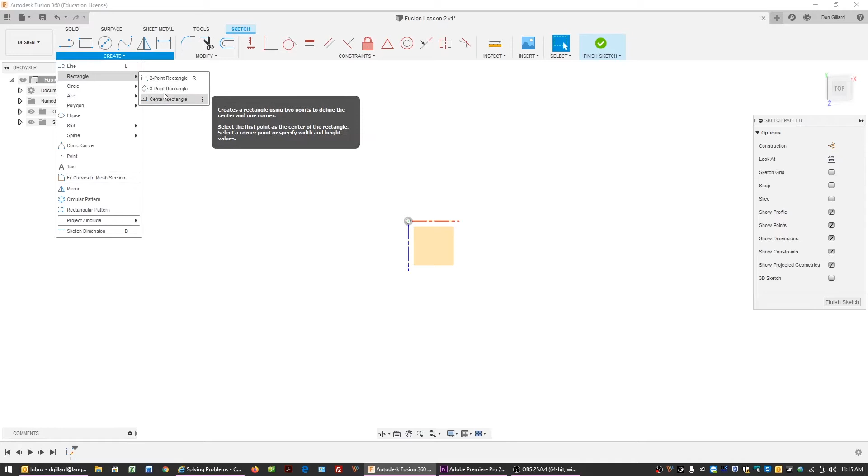Let's go to Create, and the second item down is Create Sketch. We'll click on the plan view, or top view plane. Now let's go up to Rectangle — as with most items, there are variables for how you create them, so let's use Center Rectangle. We'll click on the 0,0 origin point, and pull this out to about there.

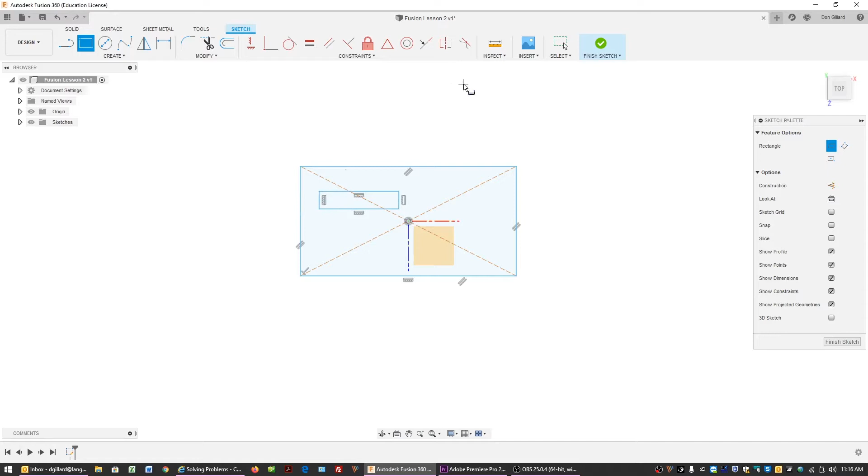Now, let's say I'm making a USB holder. I want another rectangle, but this isn't going where I want it, so let's use Create Rectangle 2 Point instead, so I don't have to start in the middle. That's great — I think I want to zoom in for this, and I'm going to create the inside of the holder.

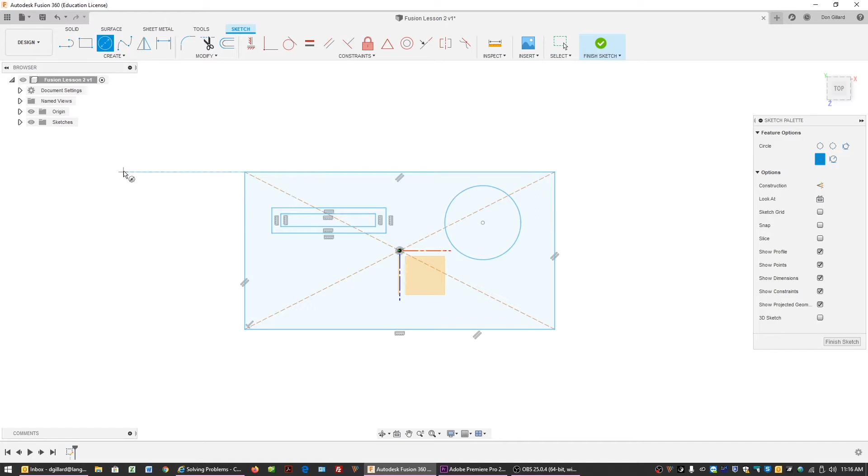Let's just create a circle over here for fun. Because I'm just trying to show you this, I'm going to do it fairly quickly — it won't be accurate or the right dimensions, but we'll go over how to do everything properly. Let's turn the origin off since we don't really need that right now.

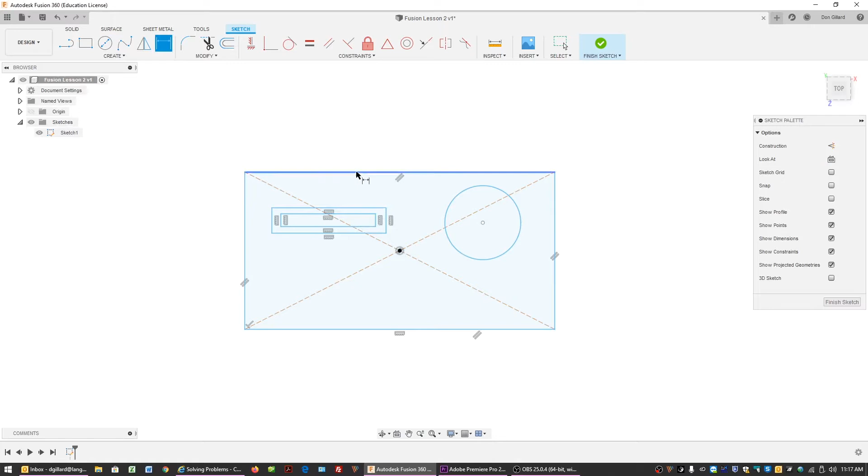Let's go to Create — the very bottom item is Sketch Dimension, shown with the letter D. You can also just hit D on your keyboard. When I click on a line, it lets me define that dimension. So I can say this should be 4 inches, and this one is 2.08 — let's just make that 2 inches. You can see how you can do all these objects with accurate dimensions.

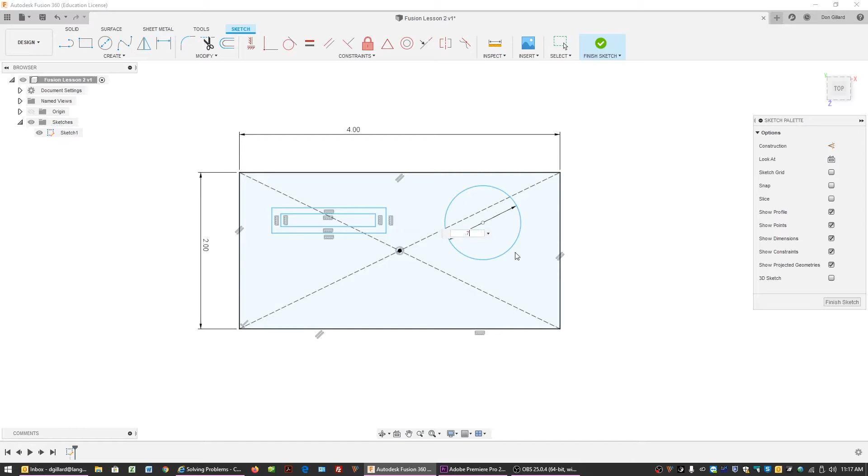So we could do accurate dimensions — I don't actually have a USB in front of me, so I'm just going to guess: let's say 1.5. Let's say that's 0.4, and again you can do it with this tool too — 1.2. I'm happy with that.

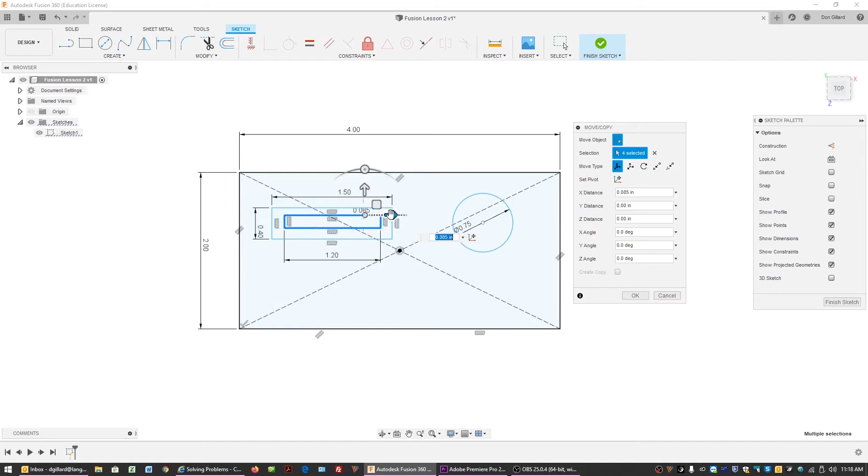Now let's go over to Modify, Move Copy. This isn't quite in the center — I'll show you a better way to do this in a bit, but we can move it now. You see these things up here, this is for rotating, so I can grab that and rotate an object too. I'll hit Control Z to undo that, and just move the arrows around until I'm happy with this, then go over here and hit OK. I'm happy with that.

Now I'll show you a better way to do that inside rectangle, because it should be accurate. You can see here on this circle — let's say I want to make that a pen holder or something. I'll go back to Modify and Offset, which you can also access with the letter O. I'm going to click on this, and you can see there's a red ring.

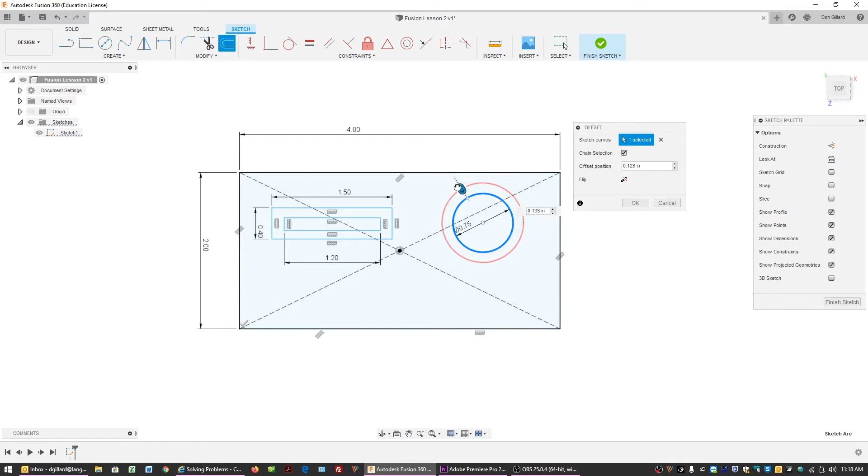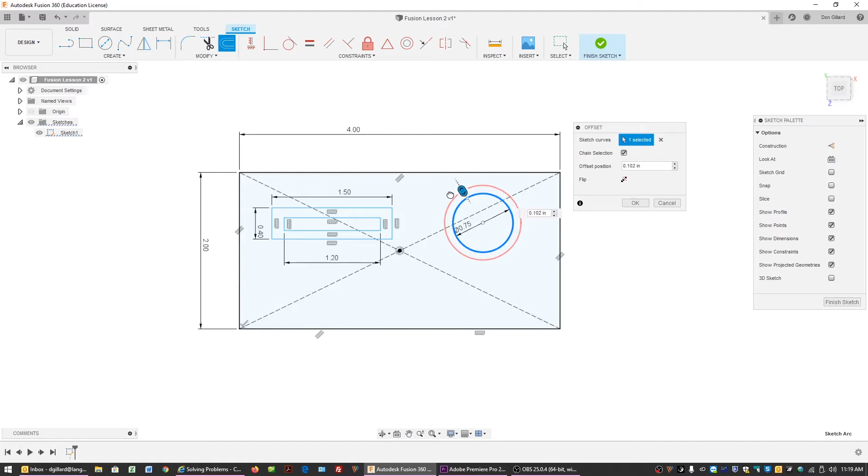That's not a cut ring like when you're modifying shapes — this is actually another line or circle offset from your original one, shown in red. So I can go inside or outside — I think I'll go outside, and that wall thickness looks about right. You can see if I had done it with this tool, it would have been accurate.

In fact, let's just click these — this is something you probably should know too. You can hit delete: click that line, delete it, delete it. Now the inside is gone, so let's go to Modify, Offset.

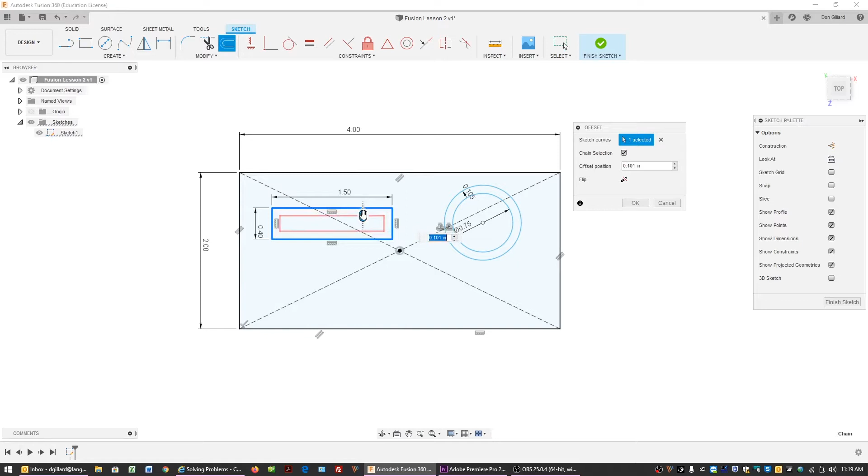And then you can see you get a perfect inside core. That looks good. Okay.

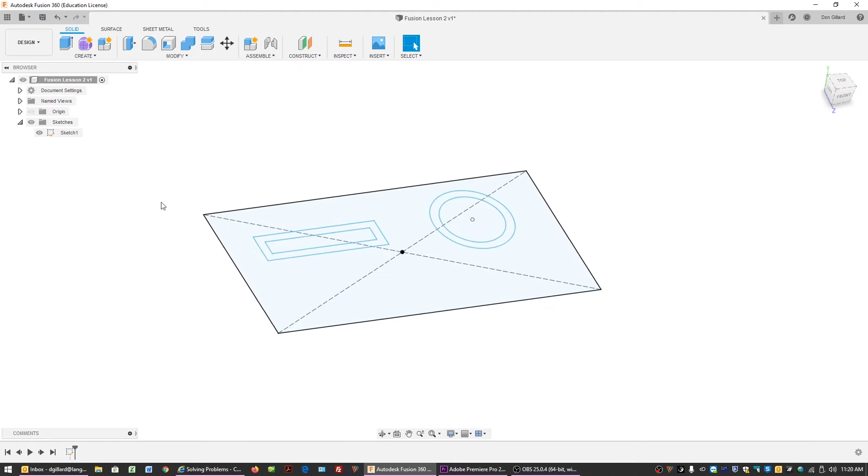So I'm just going to say now you can click here, finish sketch, or you can go up here, finish sketch, and that's it. Now if I rotate around this, you can see it's just a two-dimensional flat plane here. So what I'm going to do now is go to the Create menu.

I'm going to go Extrude. Now you can also hit the letter E, that will extrude for you. With Extrude, you click on the actual faces, and you can see I can do that. If I start extruding, you can see it's going to extrude without those holes. I'm going to cancel, it's not actually what I want to do.

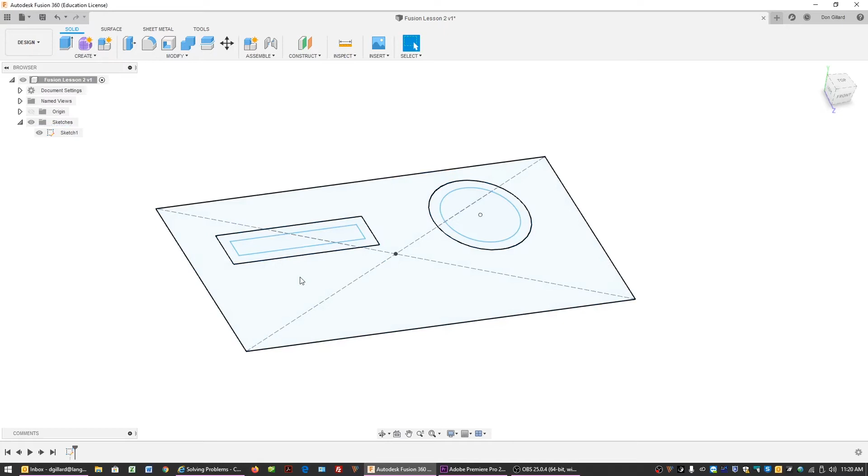I want a base, so I want everything extruded. So I'm going to hit E, and click on that, excuse me, and click on that. It's kind of in the way there.

Maybe about that thick. I would usually do a base if I'm 3D printing about 4 millimeters. I'm working in inches right now. New body looks good, I'm going to click that.

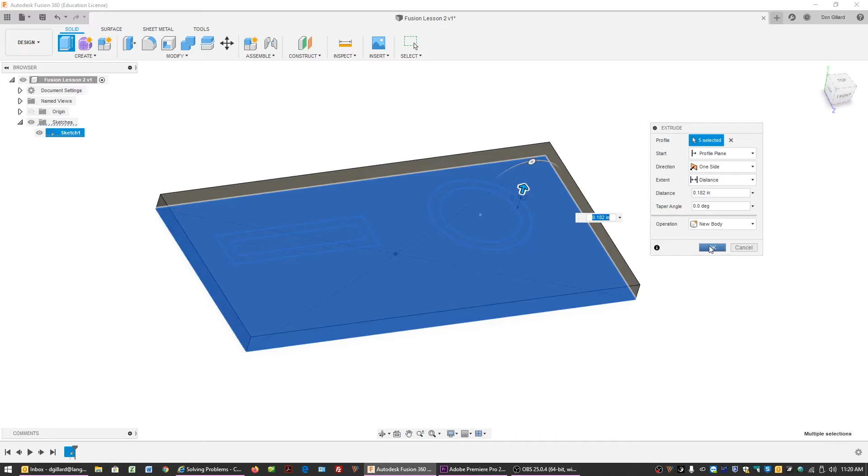Now we can fly around this, and you see there's no sketch anymore. For some reason, whenever you extrude, it turns off sketch. I'm going to turn that back on.

I'm also going to name this now. Let's say this is the base. Always good to name it. And I can also name this the base. So there's a solid rectangle.

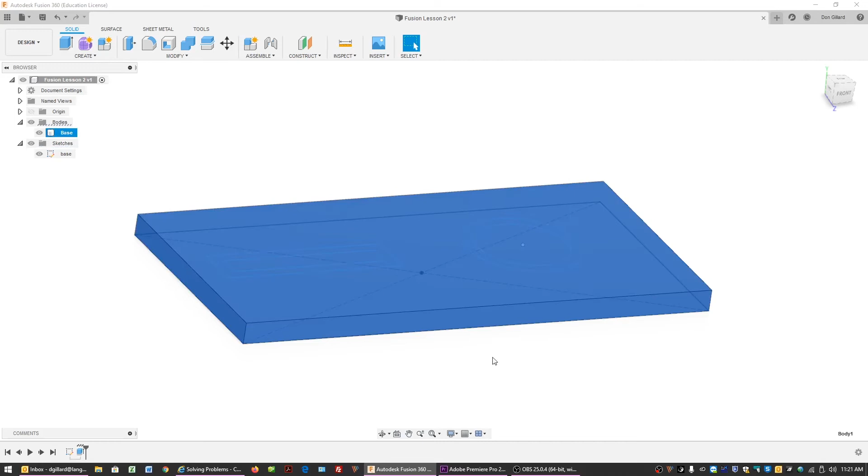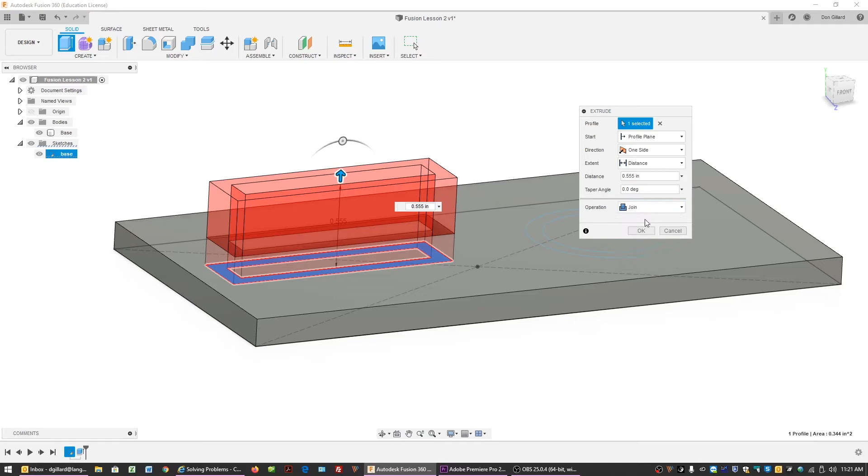Let's just go to the bottom now, and we can see these objects. I'm going to type the letter E, and just click in that area, and I'm going to extrude upwards. You can see it's going to want to cut it right away, which is fine - you can cut that out if that's what you were doing. But we want to make a slot for the USB or SD card, so I'm just going to say join.

And there we have our object, and you can see here it's the same object because we just went join. Now I could have done both of these at the same time. It's a good idea if you want to extrude things and they're all the same - you can extrude them all at once, unless you thought you may want to go back in the timeline.

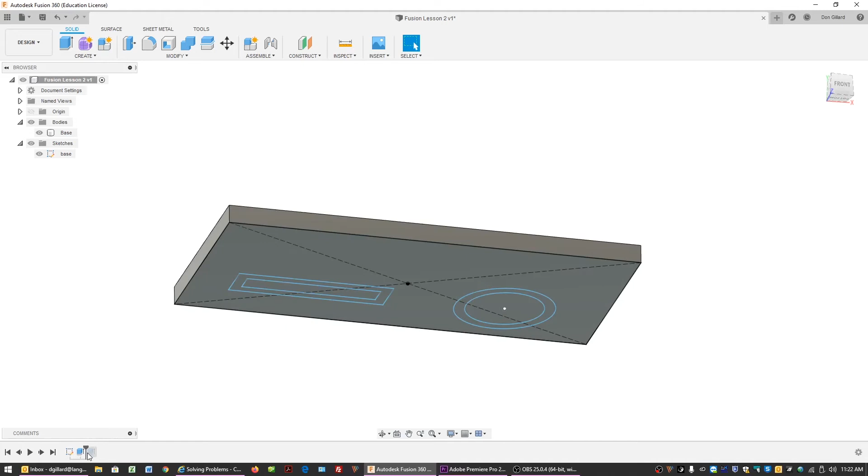Remember, we can go backwards. If you extrude everything at once, but you just want to change one thing in the future, well, you're going to have to undo all the extrudes. So I hope you understand that.

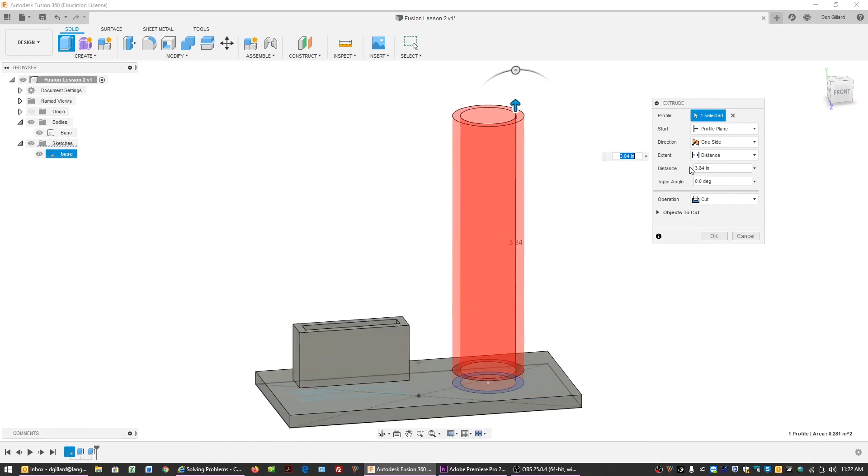So I'm going to extrude this one. Just going to click on that again, and I'm going to go up once to cut again. Thinking, well, this could be a pen holder, so I don't want cut - I want join again. There we go.

We can now turn the sketches off, and we can see the object we made.

Cool. Now, something I recommend a lot and use a lot is fillet. If you're 3D printing this, weak points are usually here - there's not a lot of material here where it joins, so there's basically a grid core in here for the actual walls. So this can be a weak area.

So I always like to fillet it. Where it meets an object, it's basically going to cove it, so you can do the cove any size you want. That's going to strengthen it a lot.

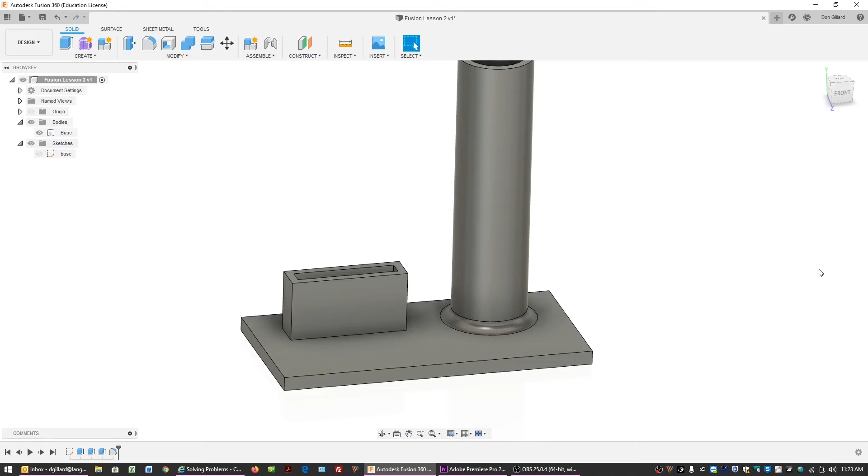Hit F for fillet again. The cool thing about Fusion is you can see I'm just rolling over and it's showing me all the lines. That's the inside line, don't want to do that. It's the outside line on the back, and that's the other line.

It is definitely good to fillet the 4 sides all at once. You don't really want to do those separately. And then if you want to go back and change them on your timeline later, you can. I'm just going to go OK, and I'm just going to show you what I mean by that.

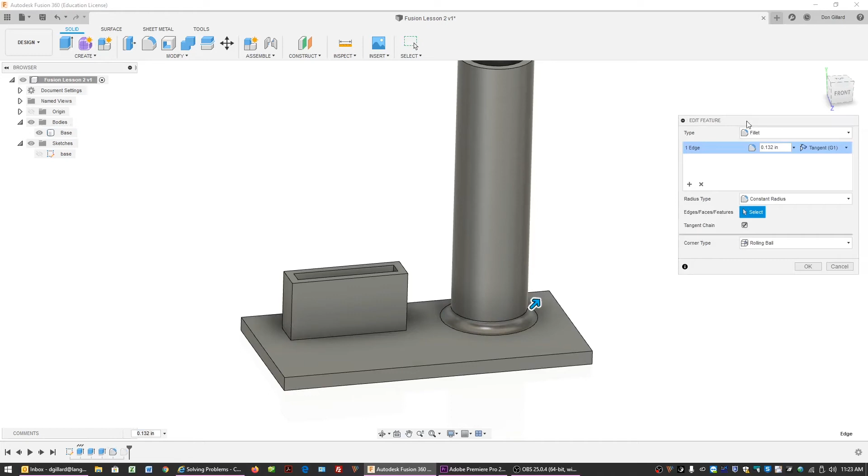I can go back to any of these. Let's say that, double click that, and I can change that to whatever I want later.

I usually like to fillet most of the lines, especially if this is going to be 3D printed. This is very important here if you're machining it, because your machine bit can't get into a perpendicular edge - it's going to have a lot of trouble.

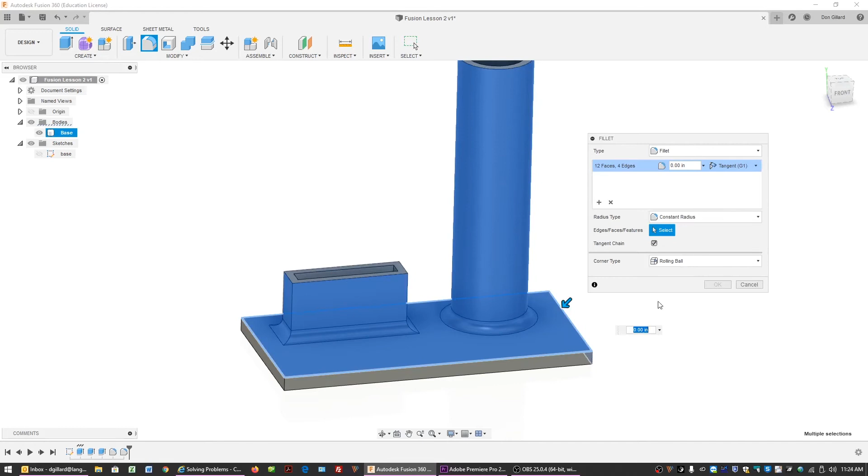This helps it out. And especially if it's in plastic, these edges are quite sharp usually, so I would usually go around and type the letter F, fillet these edges. I'd probably fillet these edges too. But okay, I clicked on a face for some reason, so got to make sure you just click the edge lines.

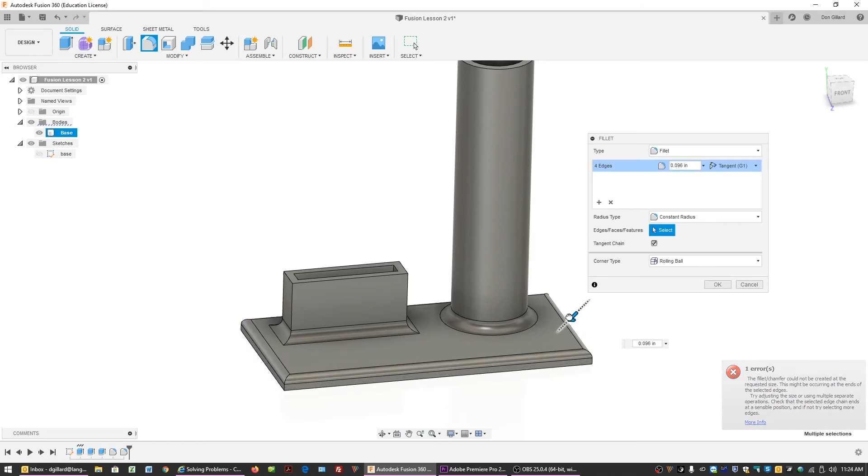And there we go, so we can go all the way. You can see the warning because I've gone past the bottom. It won't let you do things that can't actually be made, which is a great feature, and go OK.

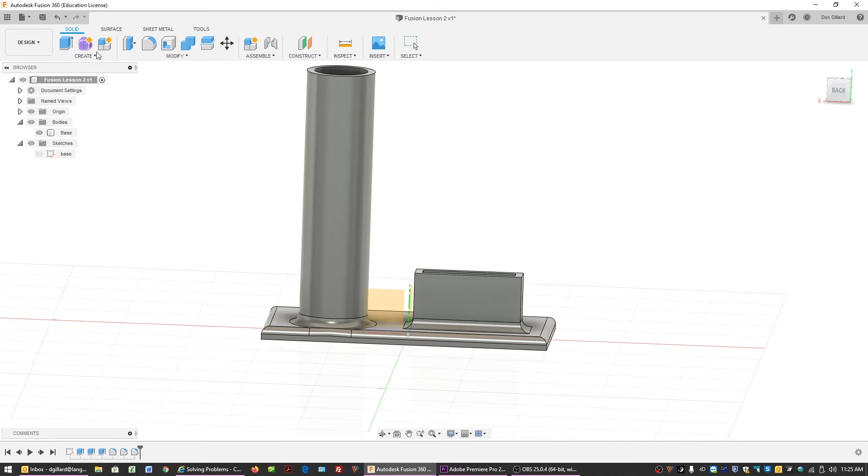Okay, I'm going to turn the origin on one more time just to show you what's going on here. Now I'm going to do another sketch, a second sketch. I'm going to go create sketch, put a hole through this thing, so I can put an object, a hole, whatever I wanted. Create sketch, I'm going to click on that plane.

I'm going to go up to circle. I think I'll just put a hole in there. I'm going to go finish sketch, and you see now I have two sketches. I'm just going to rename that. You see I'm double clicking and the sketch is coming up again. You can click on any of these at any time and pull up the sketch again and change it if you need to. So I'm just going to say hole, enter.

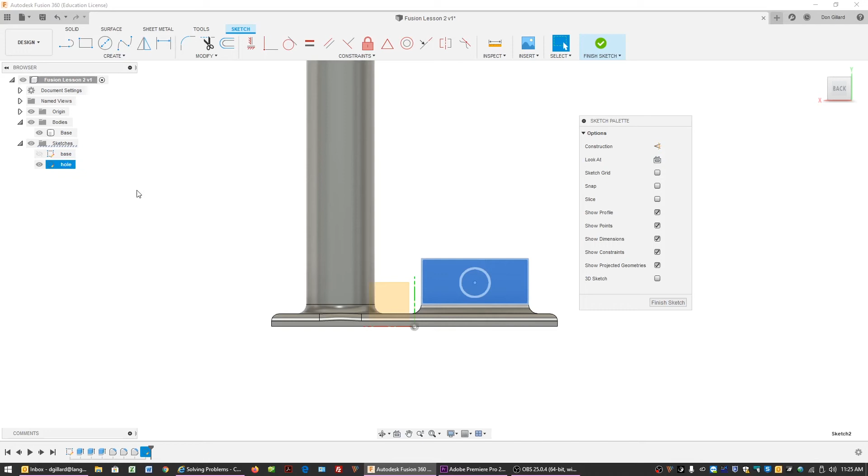I'm going to go back to finish sketch, and now you can see there's my base sketch at the bottom. I'm going to turn that off. We just want the hole sketch right now. I'm going to turn off the origin.

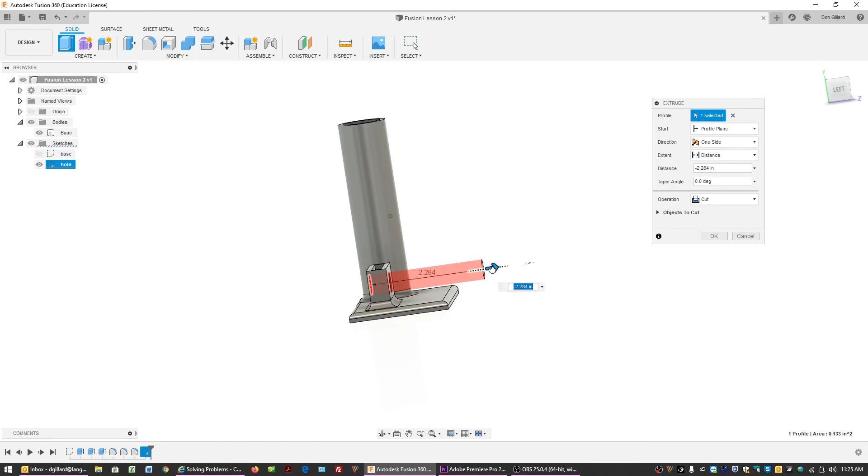Now I'm going to go extrude again, so letter E, click on that, and I'm going to go through. Now it's a good idea, if you're going right through an object, you can certainly do it by just going just past the object. That works, except for one thing: if you wanted to later go backwards on your timeline and you changed the depth of this, then it's a possibility that hole would not go through it anymore.

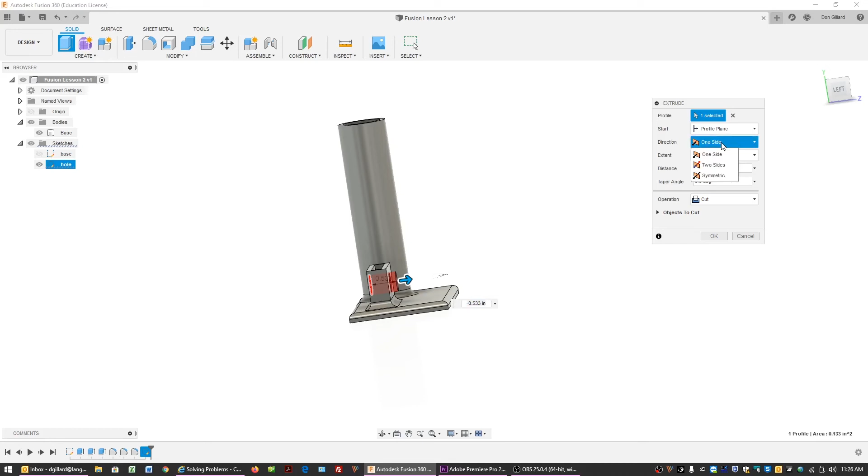So what we want to do is go up to here, it says one side, and go to two sides. Now we're going to just click on the other side where the hole comes out, and you see the hole's absolutely perfect.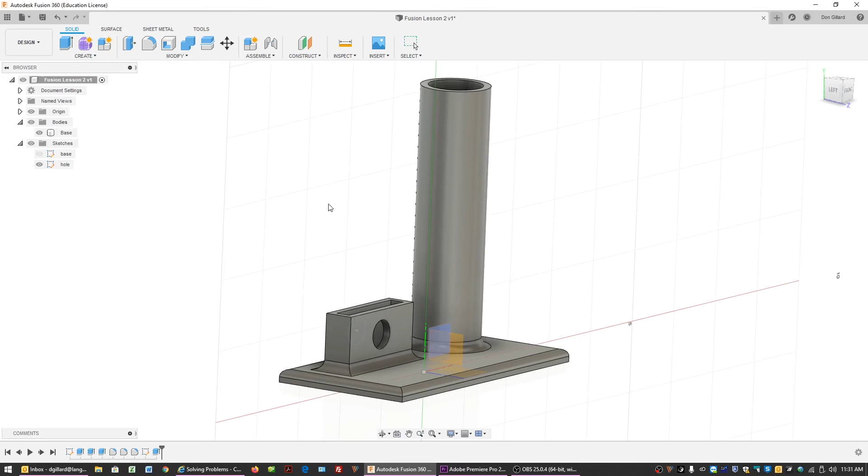Okay, so we'll try one more thing here. We're going to turn the origin on. We're going to create one more sketch. Let's do it on this line, and let's create a circle. Finish the sketch. Now I'm going to go extrude.

And again, we can do a hole all the way through, but we can also do a join, and just do a cylinder coming out of that.

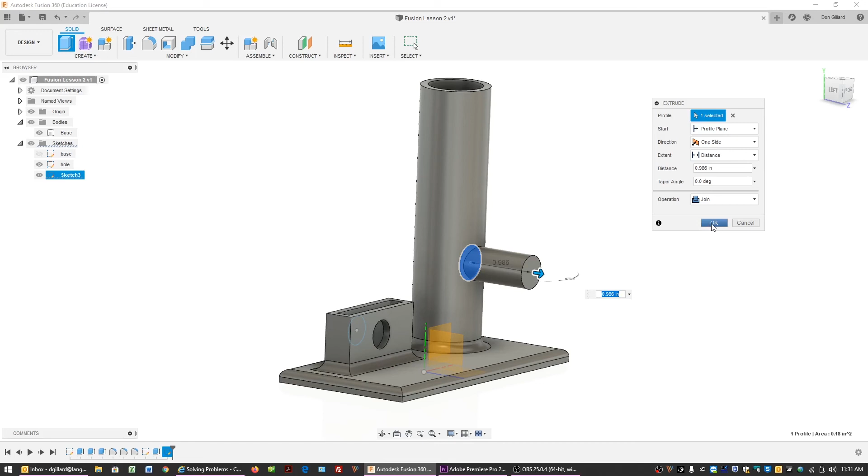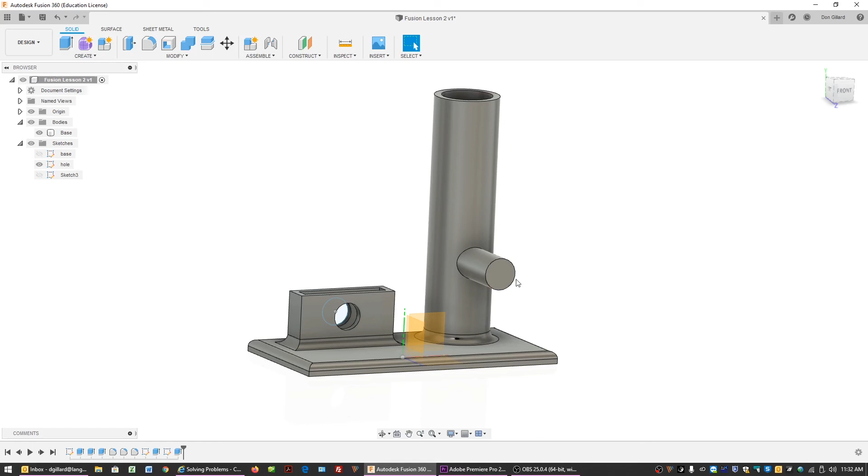Now, this doesn't really look like much, but if you think of objects, every object is just made up of a number of different objects. So really analyze what you have to do, maybe try to build something you already have, or come up with something and visualize it, try to pre-visualize it, write down dimensions, draw out, sketch out, whatever you feel comfortable with, how the object can be created, how it can be made, what shapes and forms make it, and then you can start planning out how to do this.

So again here, if we wanted to fillet this, we can do a nice fillet in here, and that's going to strengthen that.

Okay, now the last thing is we still have only one body here because everything I did was joined. So just to show you what to do if you've just created something you want to now 3D print, you can click on the base, right click, and any 3D program is going to let you do this: save as an STL, save as STL.

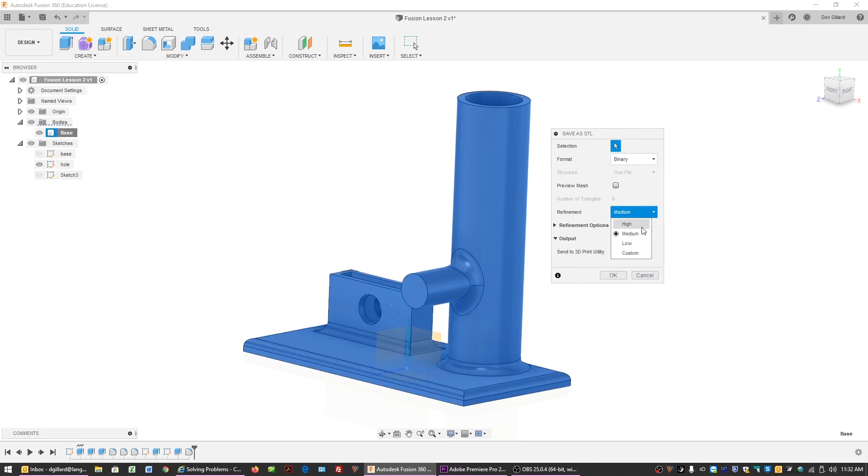You can click on the refinement here and go to high, medium, low. I usually just leave it on medium, seems to always print fine. Go OK, it's going to want to save your file somewhere as an STL. You then bring your file into a specific software program that comes with your 3D printer, and that will create the slices that your 3D printer understands.

So that's it for lesson 2: building with sketch in Fusion 360.

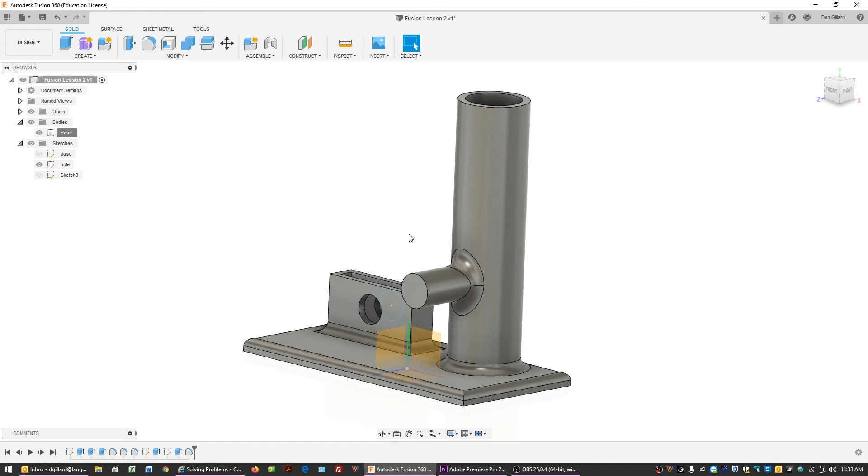Our next lesson in Fusion 360 is going to be building from forms. This is how to create really organic shapes, great for creating things like spaceships and that kind of thing. So thanks for tuning in, and we'll see you next time.